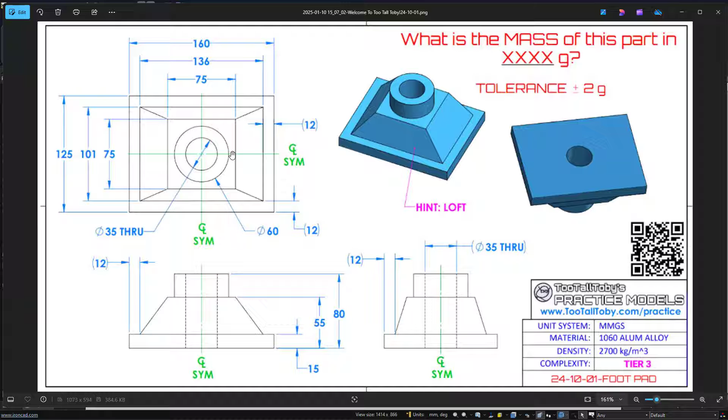Today we'll be going over Too Tall Toby's practice model dated 10/01, footpad. Looking at this model, it's very simple, starting with an extrude square, lofting, extrude cylinder, and a cut cylinder. So we start off with the dimensioning of the base, the bottom of the loft, and the top part of the loft. Then we'll have the cylinder and then the through cut cylinder. It's a very simple model, so we'll begin.

We'll begin by dragging out an extrude square, adjusting to the dimensions, so 125 by 160 with a height of 15.

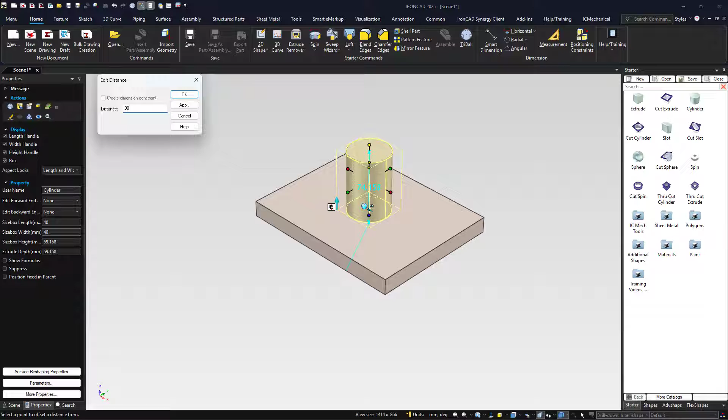Next, we'll add the extrude cylinder. The total height from this surface to this surface is 80, so we'll edit the distance from this point, make it 80, and the total height of the cylinder is 25, and we'll adjust the diameter to become 60.

Next, we'll add the loft by going to the lofting tool, choosing this part, starting from this surface and this surface here, which will give us the general loft feature and then the shape as well.

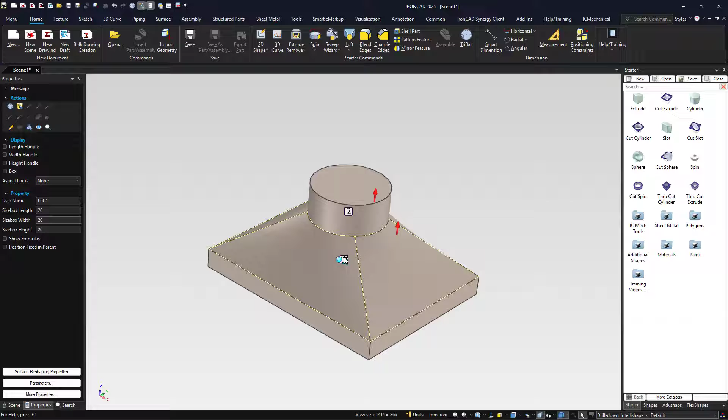We'll right-click and left-click into the loft part, right-click on number 1, and edit the cross-section. Now we can adjust from this cross-section.

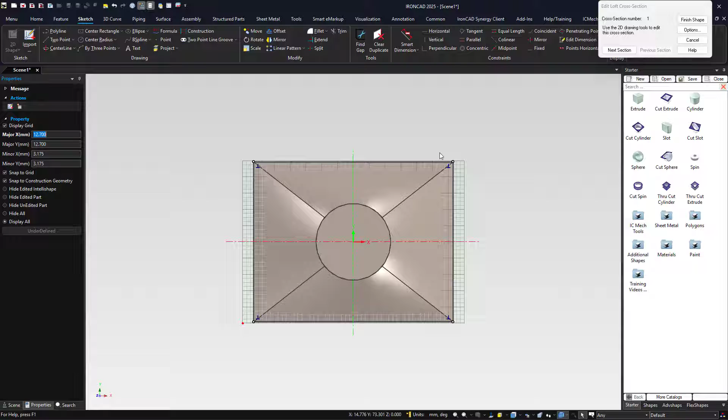Starting from here, these parts need to become vertical. This part and this part need to become horizontal. Then we need to add the coincidence mate from the midpoint here to this plane, and from the midpoint here to this plane. Now we can move from the corners and it'll adjust evenly.

This side needs to be dimensioned to 136, and this side needs to be dimensioned to 101. We'll click Next Section.

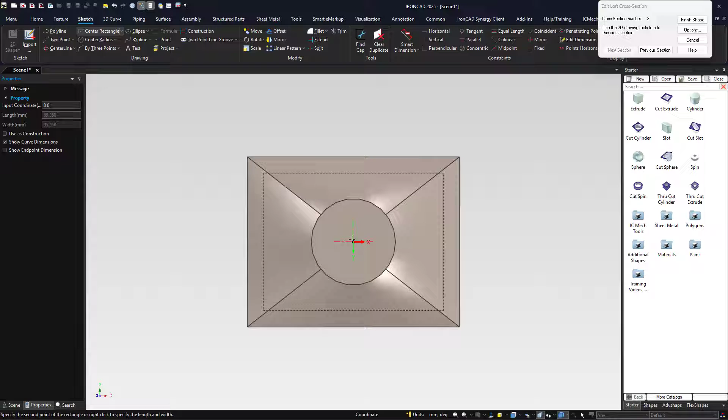This portion is not supposed to be circular, but it's supposed to be a square. So we can delete that, and because it's already centered, we can now use a center rectangle. We can right-click and adjust the length and the width. This is a 75 by 75 square. We'll click OK, and we'll click Finish, and this will then create the loft.

Lastly, what we need to add is the through cut cylinder with a dimension of 35. And here we are. Once we go into Properties, click on the part, adjust the density to 2700, and our total mass is 1809. I hope you enjoyed the video, and I'll see you in the next one.